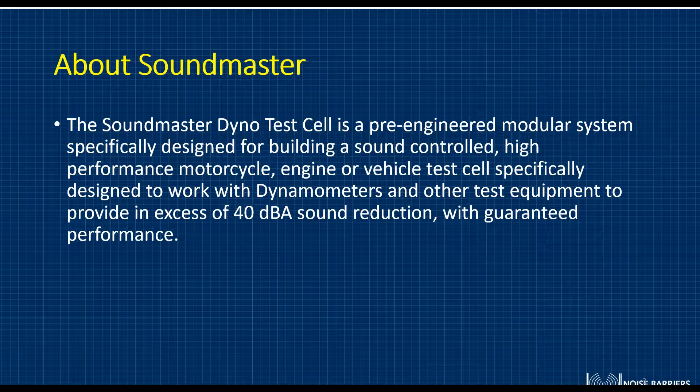First off, let's learn a little bit about Soundmaster. Soundmaster Dyno Test Cells is a pre-engineered modular system specifically designed for building a sound-controlled, high-performance motorcycle, engine, or vehicle test cell. It's specifically designed to work with dynamometers and other test equipment to provide in excess of 40 dBA of sound reduction with guaranteed performance.

For our agenda today, we'll learn why Soundmaster Dyno Test Cell. Why is it designed for equipment and airflow? We'll discuss the engine test cells, chassis test cells, and finish with motorcycle test cells.

First off, why Soundmaster? Soundmaster Test Cell is more than just a box. A test cell should be designed with hearing and respiratory safety in mind. We include silenced ventilation and high STC value walls, doors, and windows to accomplish that.

Custom is our standard. This sets us apart from other providers that really approach it as a cookie-cutter approach. The Soundmaster Test Cell considers your testing needs, your building constraints, not just a cookie-cutter approach like I mentioned. Average horsepower levels are a critical thing to consider while we're designing that test cell. And we also want to look at steady state testing or endurance testing if that's in your future.

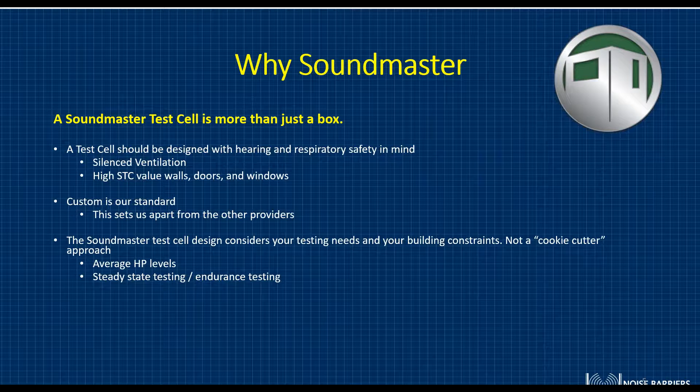Very few host buildings are designed with a dyno test cell in mind. You need to get air in and out of the test cell. We arrange the silenced ventilation system layout to meet your building design. The modular panel systems, doors, windows, and ventilation systems are acoustically matched to fit your particular requirements. Materials are also tested in a NVLAP accredited acoustical lab.

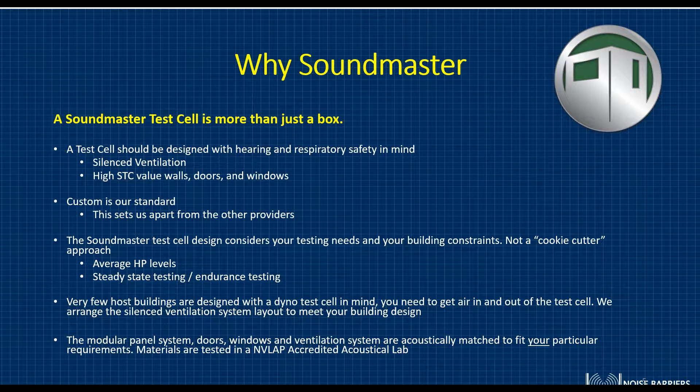The two silencer banks, both on the air inlet and exhaust air, help condition the noise that may leave the test cell or enter the test cell coming from external locations. Of course, we have a number of window and door options that are available.

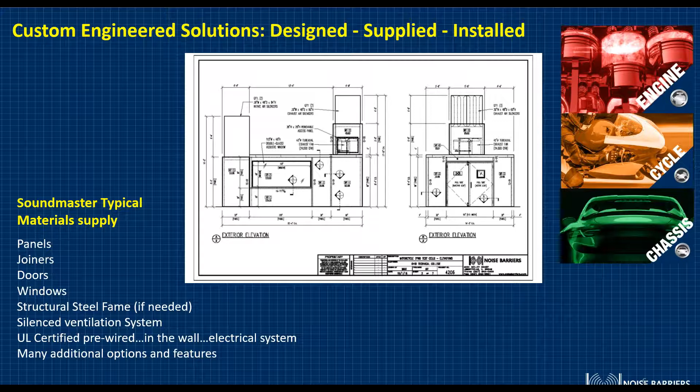Our Soundmaster typical material supply are the panels, the joiners that connect the panels, doors, windows, structural steel frame if needed, and that does not only support the roof or any materials that you may need to store or locate on the roof. We can supply the silenced ventilation system, a UL certified pre-wired system in the wall, and many additional options and features.

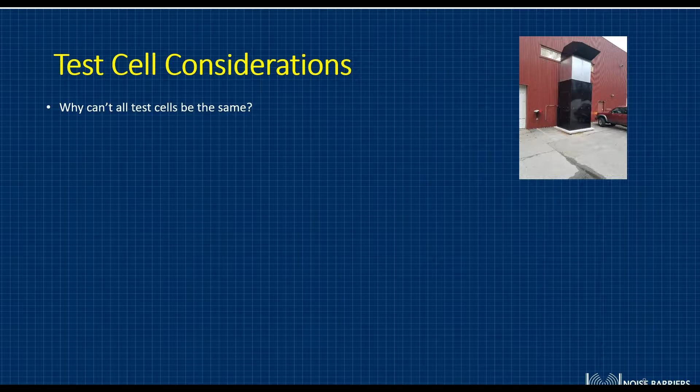Why is the test cell designed for equipment and airflow? Well, there's a lot of different considerations that go into that. Why can't all test cells be the same? Well, there's no two buildings that are the same. There's no two people that are the same. So we really have to take into account how we're going to design that. It's a focused design around your dyno, your facility, and your particular needs.

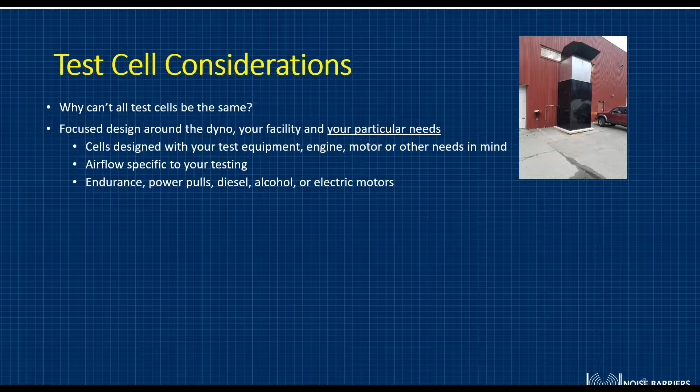Cells designed with your test equipment, engine, electric motor, or other needs in mind. Airflow specific to your testing. And that's because of endurance testing, power pulls, diesel applications, alcohol engines, which are a special consideration, or electric motors.

What does it mean when we say custom design to fit your facility? Well, the airflow CFM should be at least 5 to 10 times the volume of your cell, depending on your fuel type and horsepower. The cell should be large enough to make it easy for technicians to move safely around the test specimen, but not too large as it will drive the ventilation costs. Fans are typically included in an integrated exhaust plenum.

Why do we recommend field wiring? In a lot of cases, requirements vary greatly from user to user. It's best practice to hire a local electrician to provide your electrical system and ensure your code compliance.

Why Noise Barriers recommends the use of a variable speed drive and its advantages. This allows you to vary the fan performance for any given condition. Say if you're simply filling a fuel tank, or if you're doing high load extreme endurance testing, you may want to have the fan at different speeds for those.

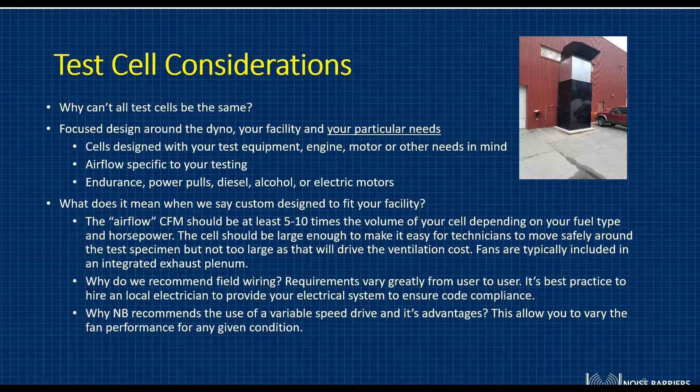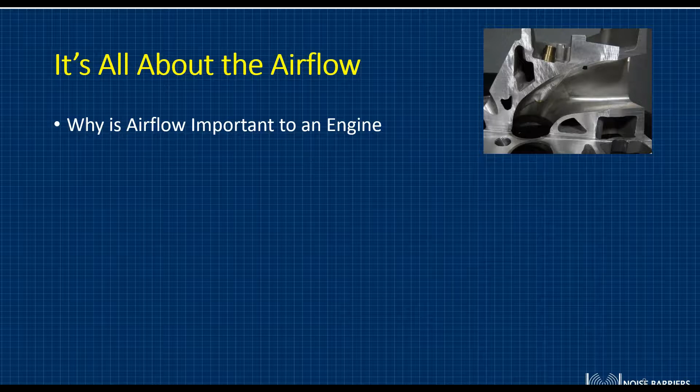It's all about the airflow. Why is airflow important to an engine? We have a nice cross section of a cylinder head at the top. And we have to realize that an engine is a self-driven air pump. The quality of the air going in dramatically affects the power.

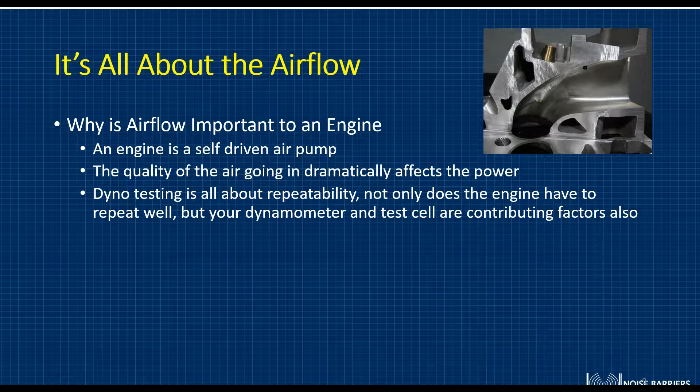Dyno testing is all about repeatability. Not only does the engine have to repeat well, but your dynamometer and test cell are contributing factors also. We're trying to make the test cell the true constant in your testing. What other factors affect power? Of course, there's always temperature, humidity, and atmospherics. Combustion air systems, which will try to normalize the air that's going into the engine. And temperature-controlled environments. In most user test cells, these are pretty cost prohibitive.

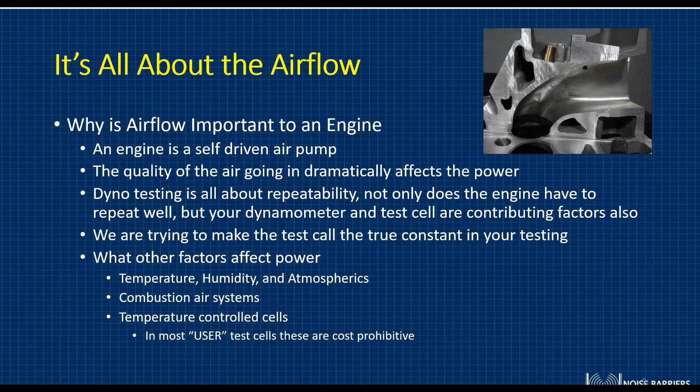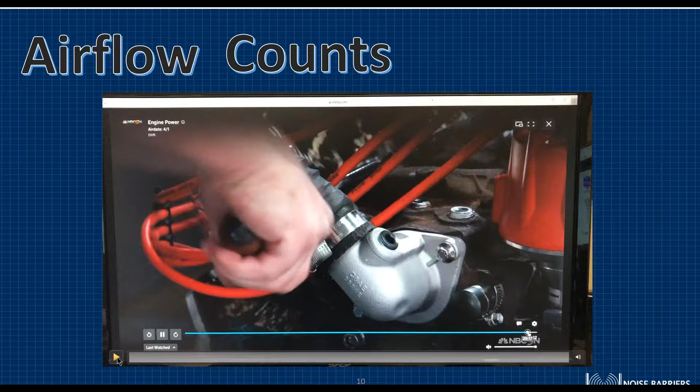This is a great video that I captured off our guys at Engine Power as they were pulling an engine out of the junkyard. They decided to stick it on the dyno in our test cell that we recently provided for them, replacing another manufacturer because it had airflow issues. So this test cell design really kind of takes in their facility.

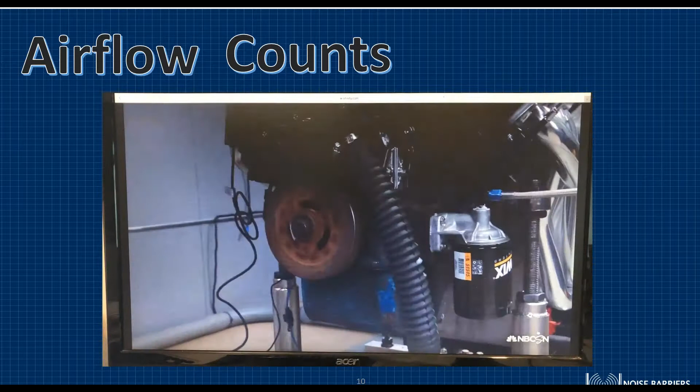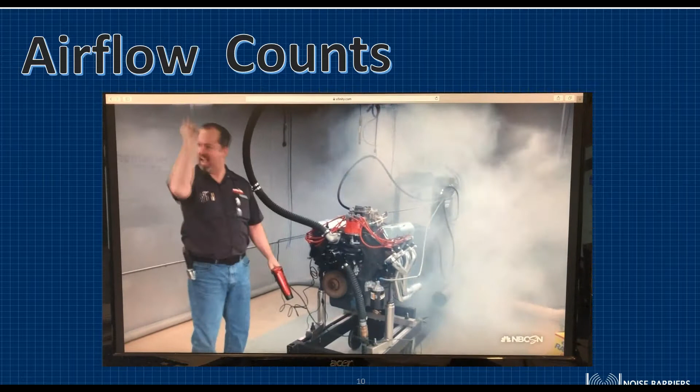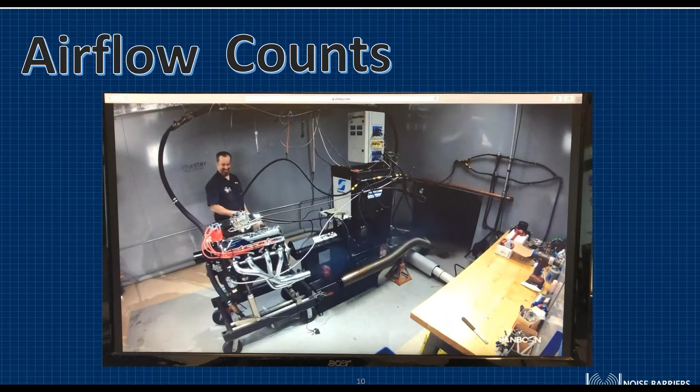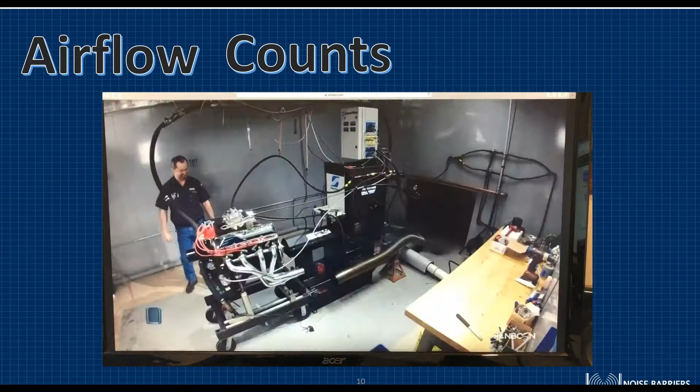If you notice, as Pat and Mike here start the engine, they forget one critical thing in the test cell. They forget the fan. This is a great example, as he turns this on here, how uniform the airflow gets pulled or extracted out of the test cell. So as we watch, the entire column of air very uniformly is pulled out of the test cell, and you notice how far back the headers are actually bleeding exhaust air in and how clean the airflow is still in the test cell. Also look at the carburetor and how clean the airflow is over the carburetor. That's a critical item.

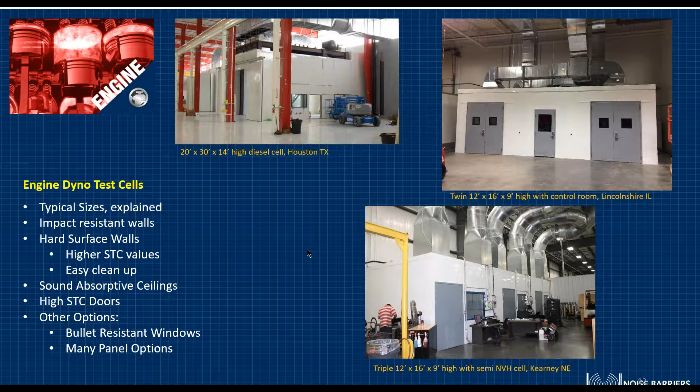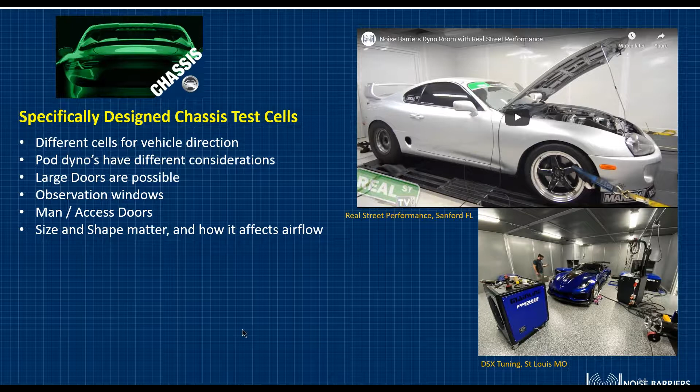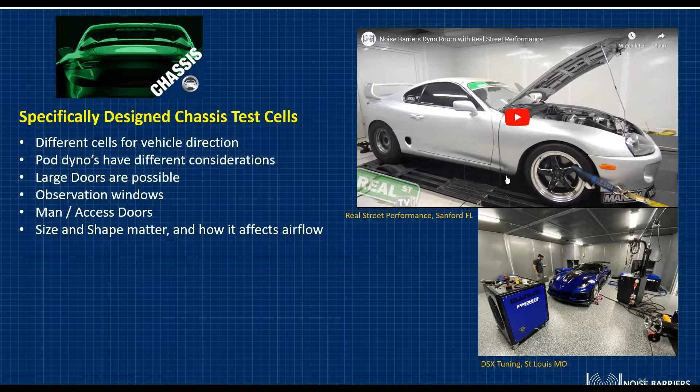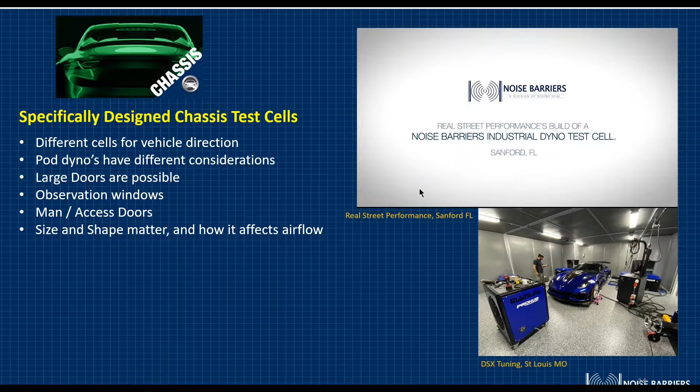At the top right, we have a great video that was done by the guys at Real Street Performance, one of our recent customers. And it shows the assembly of the test cell. I'll walk you through that real quickly. This is also available on our website if you needed to revisit this.

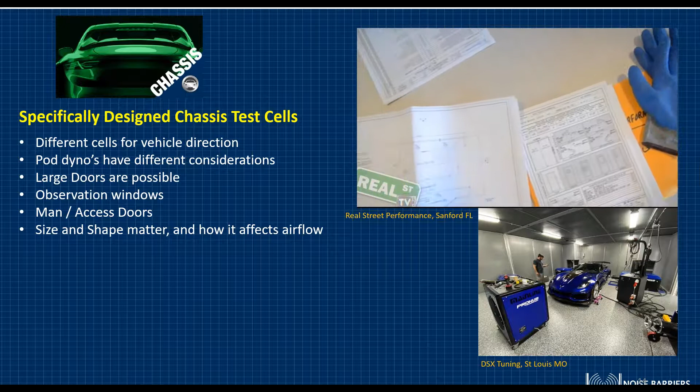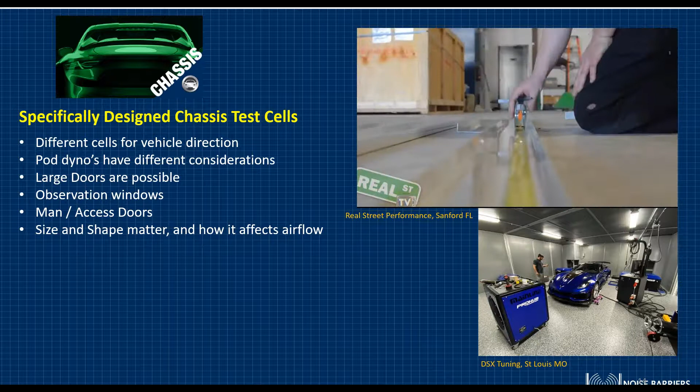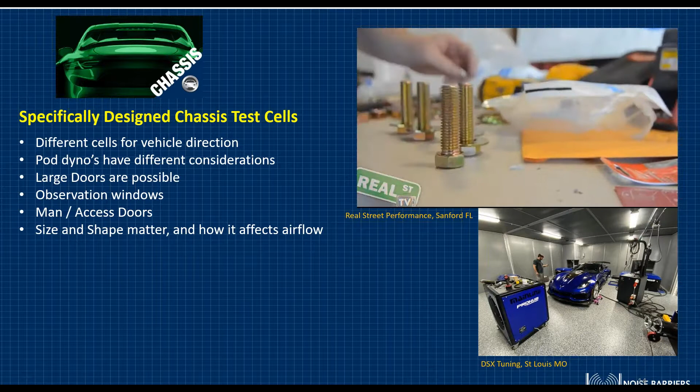All of our materials are going to show up, and before we do any construction, you have the opportunity to design, redesign, and approve your drawings. Materials show up in a very well-created system. Materials are also pre-cut, so that speeds your installation. Doing a quick inventory of the materials, drilling for any floor anchors that are necessary. And now he's going to start erecting the structural steel that I mentioned and panels.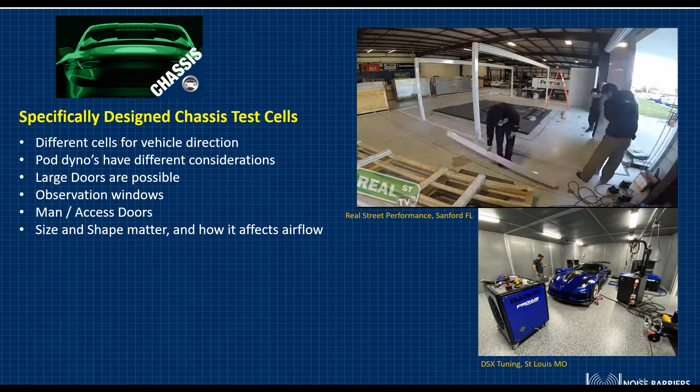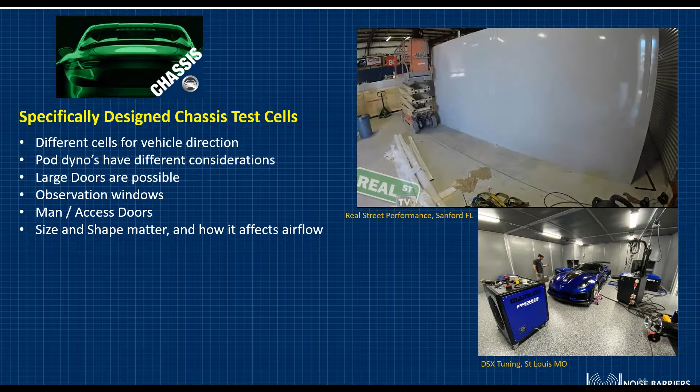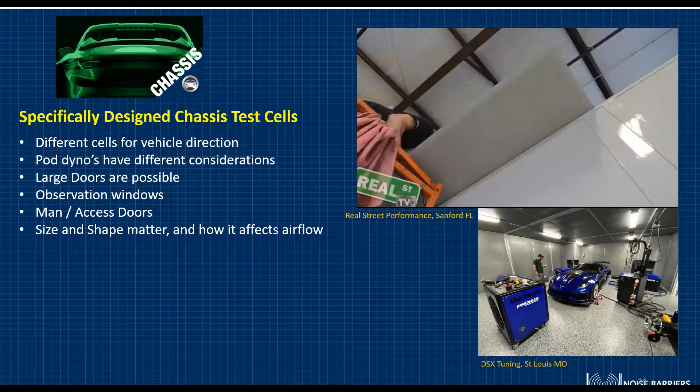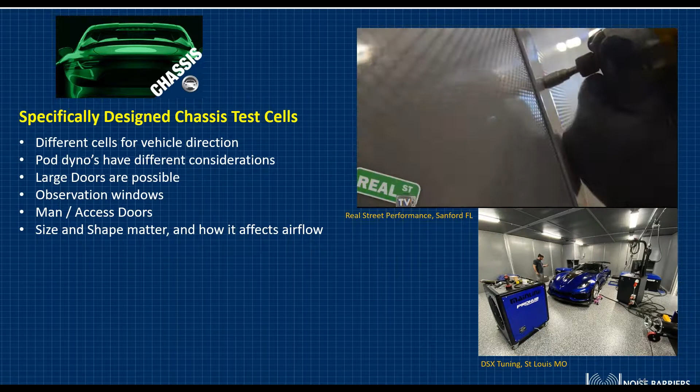They're simple Tek screw connections, and the H-joiners are the components that go between each of the panels, as I mentioned, the joiners at the beginning. We're assembling the back wall. And now they start assembling the roof. You can see that the structural steel is an integral part as it's picking up the load points from the panels covering the roof. That was a great shot of the perforated panel as it gets inserted.

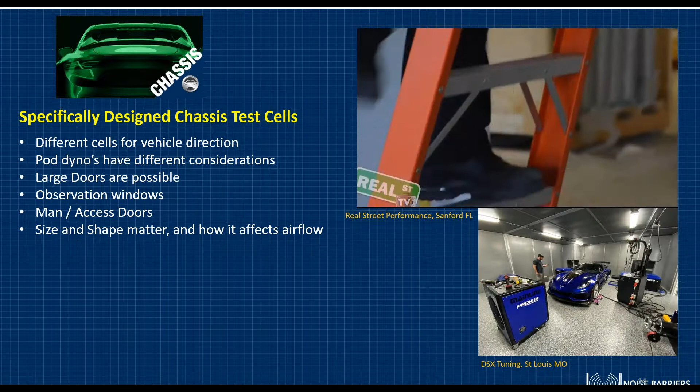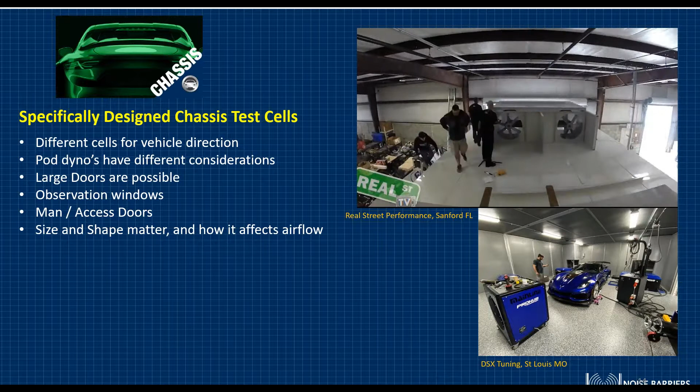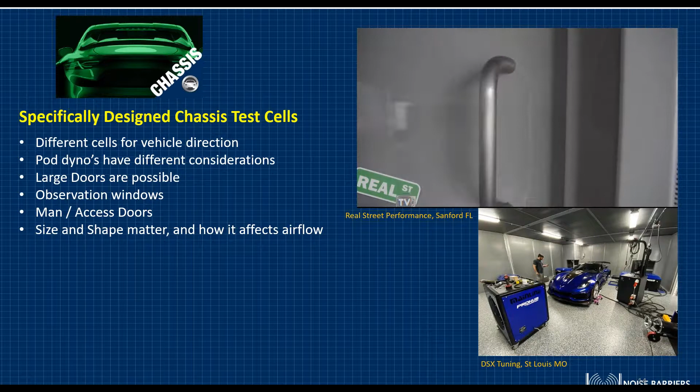Now they're starting to install the fan plenum. We enclose the fans to minimize the noise and the impact noise that your shop space is seeing. So as they're enclosing this, they'll make a connection to and through the host building after the silencers are installed. And that really completes a lot of the installation and how the airflow is exhausted out of your facility.

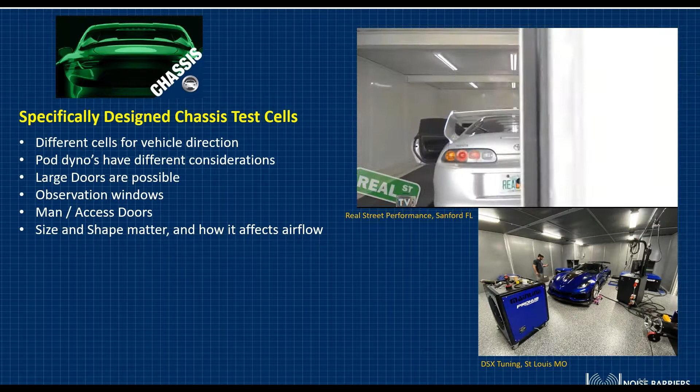The silencers at the front of the test cells, in this case, are directly drawn from the shop environment. But since we're able to provide that 40 dB of noise reduction, the shop environment is not dramatically affected by the noise coming from the vehicle under test.

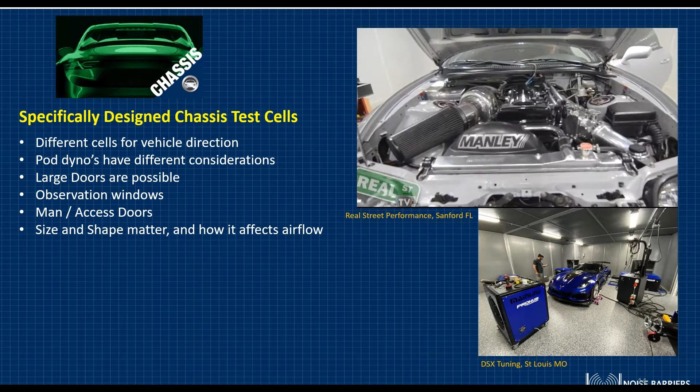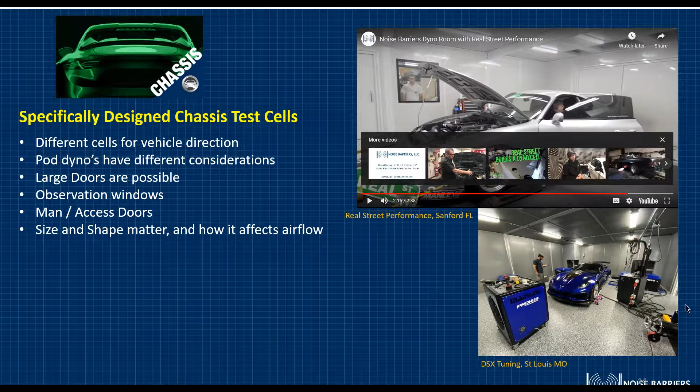The bottom test cell is DSX Tuning. It's a recent test cell that was just installed in May here. And as I started putting together this webinar, I wanted to reach out and speak with them about their feelings on the test cell. Dave Steck at DSX Tuning sent me this great caption: The room is weird. My Corvette is louder than sin, but even inside the room with it, it's tolerable. Outside the building, if a car is making a pull, it sounds like the car is a mile away. We are super happy with it, especially with the ventilation system.

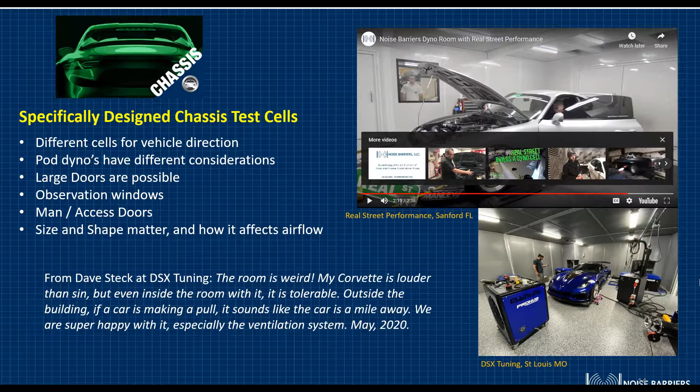And you see in this case, it is a pod dyno. It is a very wide test cell because of the horsepower rating on the pods. We have the exhaust air extraction at the rear corners of the test cell inside, and it is providing about 54,000 CFM of airflow.

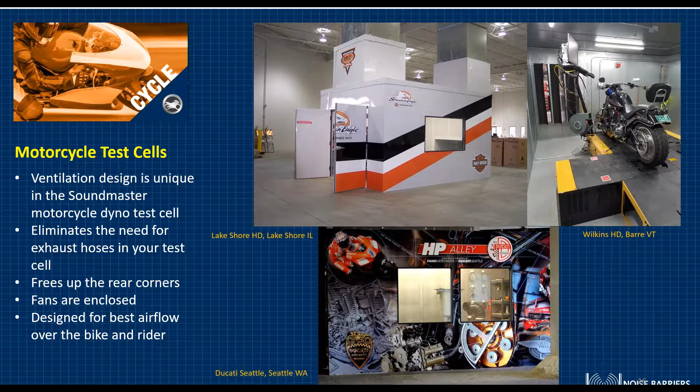The Ducati Seattle picture at the bottom is a great example of a customer going to that nth degree, wrapping the test cell. It's got some great customer viewing windows in it. So that's just an example of what you can do at your facility. And the Wilkins Harley-Davidson has a unique condition where they needed to have airflow at a side point and exit out a rear side. So we're able to accommodate that and locate the fan in the plenum box outside the building.

So what makes Soundmaster different from standard construction? First off, the project is designed and submittal drawings are done by Soundmaster. Faster construction turnaround when compared to standard construction, which minimizes the coordination between trades. It's a clean installation. As you've seen in the Real Street video, there's little disruption to your facility. It's a modular panel system, so it installs very quickly.

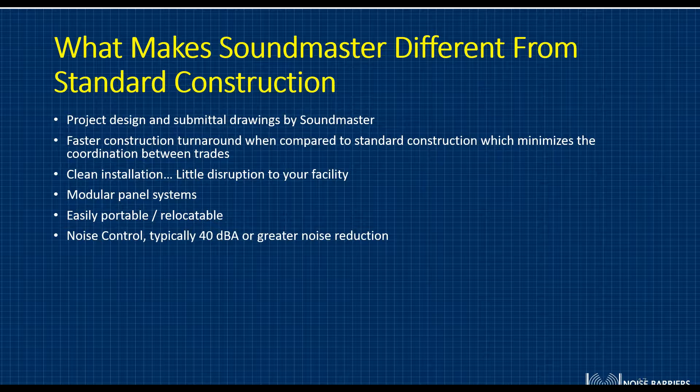It's easily portable and relocatable. The noise control is typically 40 dBA or greater of noise reduction. This noise isolated fans, again, reduces the impact to your shop and your workers. Sound controlled doors and windows can be made any size and any configuration. The silenced ventilation actually makes you a better neighbor. I've had instances where we've had Harley facilities next door from residential, and they never knew they had a dynamometer. Test containment in case you have those unfortunate points where engines fail.

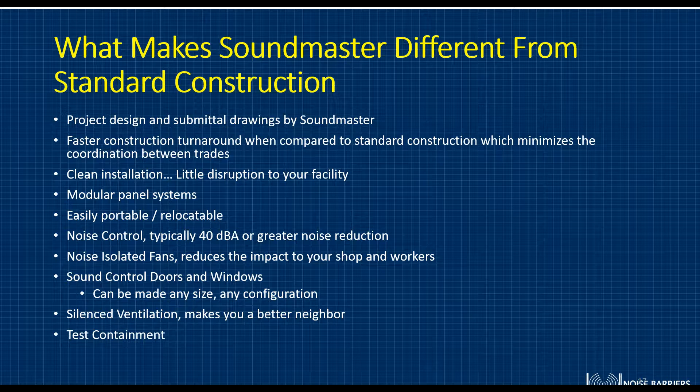So the components, we can help make your conventional test cell even better. We have noise controlled doors that can be augmented, from bipart sliding doors to simple man doors or specialty doors with hatch considerations if you have an overhead crane. Windows, bullet resistant windows for operators, or if you just need vision windows for special projects or unique client situations.

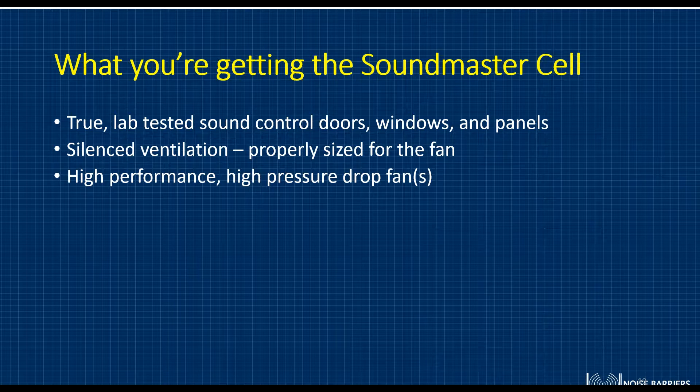So what you're getting with this Soundmaster Cell. First off, it's true lab-tested sound-controlled doors, windows, and panels. Silenced ventilation, properly sized for the fan. And we can vary the fan size, and we're an OEM as a fan distributor and can basically provide the fans cheaper than what you can get them for. They're high performance, high pressure drop fans. All of our materials are pre-cut.

They're ready for installation. A conventional test cell with similar material costs more than modular construction. And that's meaning the doors, windows, and panels, and the ventilation systems, which are typically the most forgotten part of a self-built test cell. The higher initial cost of a modular cell is easily offset when you consider the portability, taxes, and resellability of the cell. The acoustically designed materials typically perform better as a system than conventional construction.

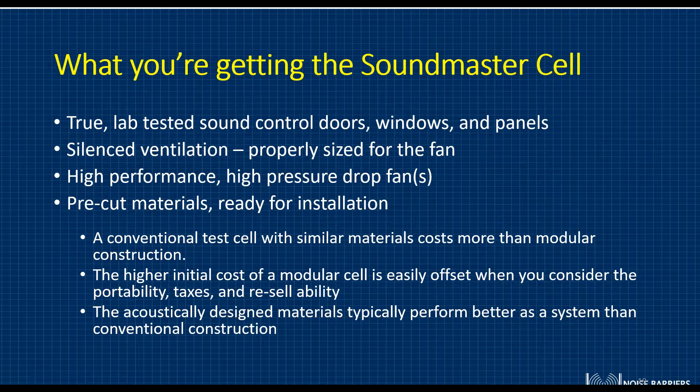Let's close with a simple summary. Noise Barriers offers improved safety, not only hearing, but airflow and personnel protection. Turnkey capabilities of the design, the materials and supply, and installation services. We can also PE stamp our materials if necessary for those locations in California or seismic areas. The test cells are designed to meet your specific need. It's guaranteed acoustic performance, guaranteed airflow performance, enhanced testing accuracy and repeatability.

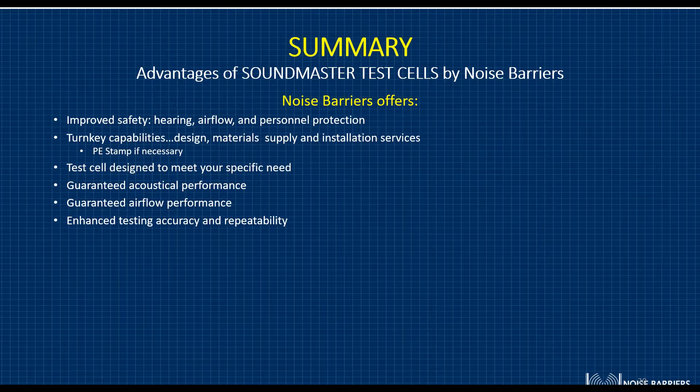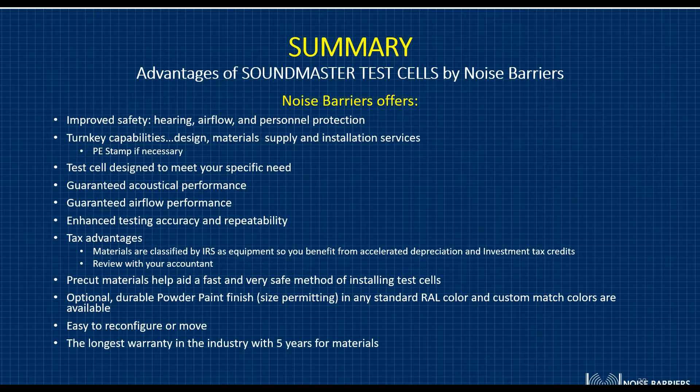There's tax advantages. The materials are classified by the IRS as equipment, so you can benefit from accelerated depreciation and investment tax credits. You can review this with your accountant. Pre-cut materials help aid a fast and very safe method of installation of the test cells. There's an optional durable powder paint finish, depending on the size, and any standard RAL color or custom match colors are also available at an additional cost. They're easy to reconfigure or move. It's simply adding panels or relocating the panels. It's the longest warranty in the industry, with 5 years for materials.